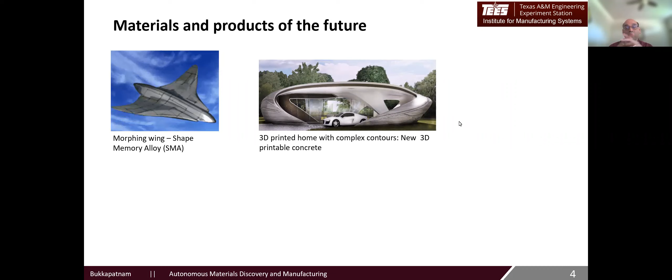To set the stage here, if you look at the recent innovations in materials and processes, they've opened some very exciting possibilities to create entirely new, radically new kinds of products. One example is the fact that new classes of shape memory alloy materials, especially the high temperature and extreme environment shape memory alloys, or SMAs, are leading to the creation of so-called morphing chevron wings, as well as other extreme environment structures. Similarly, the discovery of newer kinds of concrete are starting to revolutionize 3D printing of whole homes, as well as several consumer products. These discoveries are essentially fueled by three major global imperatives.

The first one is because of the growth in the competitive landscape.

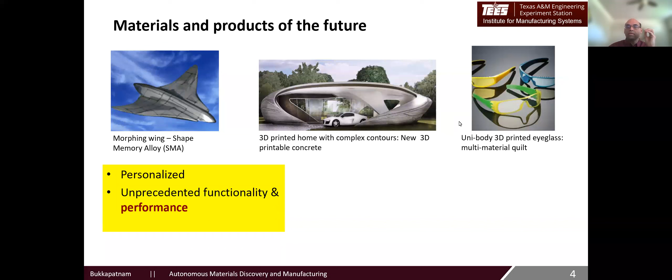There is a need to enhance the performance envelope of various products and systems for industry as well as the strategic sector. The second driving force is the global push towards green energy and green manufacturing, which is forcing the reduction of material usage as well as optimal usage of materials, processes, and energy.

The third driving force is the growing problem of critical material shortage, especially for some highly strategic applications, as well as emerging sectors like autonomous transportation, where battery is going to be critical, and the newer hydrogen economy, hypersonics, and microelectronics.

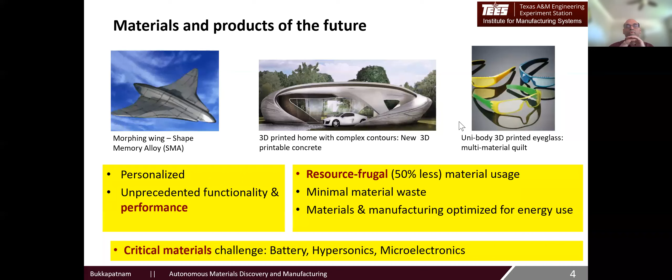While this discovery is an exciting and emerging topic, the process of discovery has traditionally been a very long drawn process. To underscore this, let me provide a case study based on what one of my colleagues, Professor Ibrahim Karaman from Material Science, has experienced.

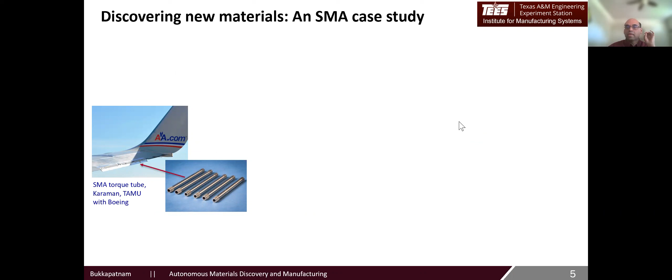He developed an SMA torque tube, basically a shape memory alloy component, that became part of aerospace structures in recent years. But the discovery of this material essentially involved a painstaking effort where he created a precise composition of a nickel titanium hafnium system, and it was processed through a multi-stage manufacturing process, each controlled with a precise set of process conditions to realize the desired shape memory effect that was helpful for functional application.

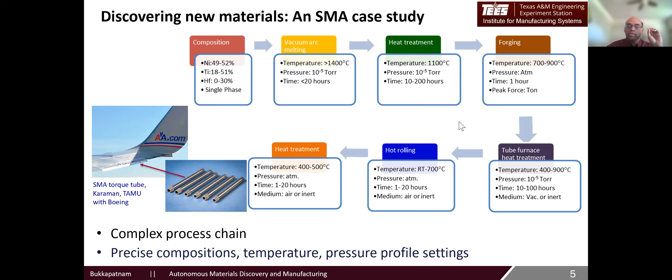This process of arriving at the material composition as well as the processing recipe took about 15 years. And this 15 years essentially involved running multiple iterations of experiments to make sure the end goal of the desired shape memory characteristic is reached, by playing as well as tailoring the structure of the material at multiple scales and from multiple ways, looking at the crystallography, the grains, precipitations, and so on.

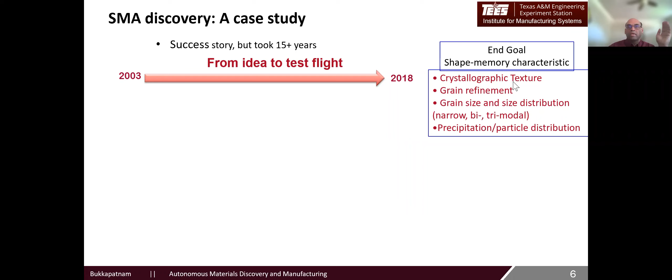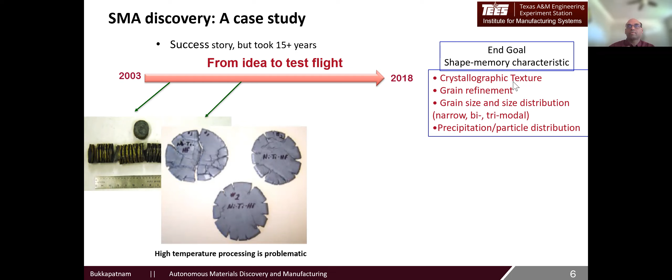If you look at the entire process of innovating this material, it essentially involved a series of iterative experiments. Initial iterations were mostly not successful. Over time, through experimental iterations, they were able to make progress, leading to the creation of the final product system. And this is what took those 15 years, essentially: make, try, and measure, and then try to make again.

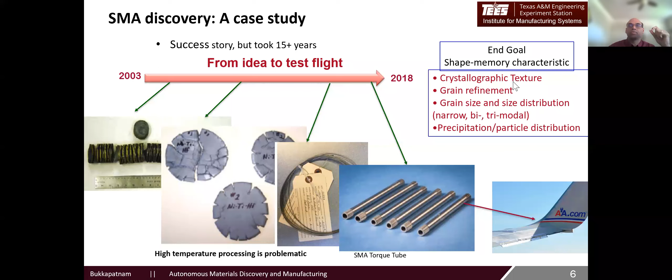This process of iterative experimentation, if you abstract it up, can essentially be seen as having each experiment be a point in the abstract material design space. In other words, if you think about the entire process of choosing the right experimental point, it essentially boils down to choosing a particular value for the composition, the various process settings, the temperature, the pressure, the force profiles, and so on, so that you realize a particular combination of these properties, like crystal structure, grain refinement, etc.

The overall process of experimental iterations leading to the discovery boils down to basically searching this material design space to find the desired combination of the composition as well as the processing conditions to achieve the desired structure. As you can quickly see, such a traditional process of materials discovery is lengthy and of course can be very expensive.

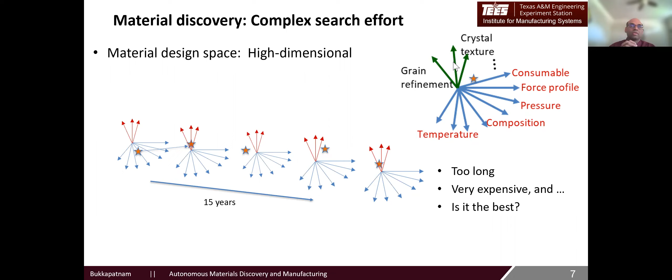With the modern capabilities that we have, we can even think about an audacious goal of reducing this overall time for discovery significantly. The goal of AMDM, or Autonomous Materials Discovery and Manufacturing, is essentially to achieve this compression in time and increase the efficiency as well as effectiveness of this discovery and manufacturing process.

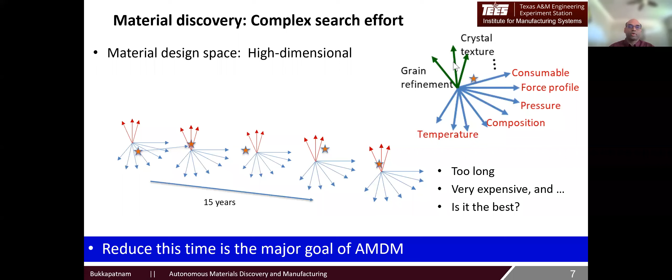So to state the objective: it is essentially to discover novel materials with specified tailored properties, as well as their manufacturing recipes, automatically and autonomously through computers by the use of advances in artificial intelligence and data science.

Although this goal looks a bit audacious, such AMDM systems have already been realized in other fields, especially in drug discovery type areas, as well as chemical processes. There have been some recent successes.

A couple of years ago, a paper from Nature talked about a mobile robot chemist that goes through the entire lab, scans through the lab, and then goes to the right instrument or platform to conduct the desired test. Once the test is done, it goes and measures, and based on what it gleans from the measurement, it decides where to go for the next round of experiments.

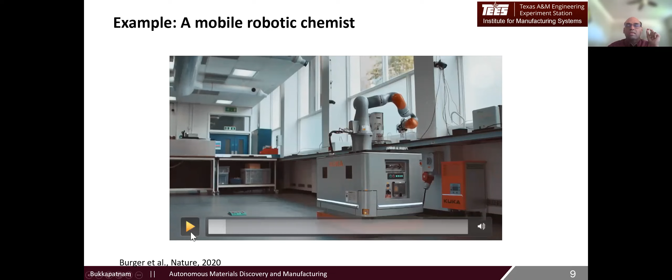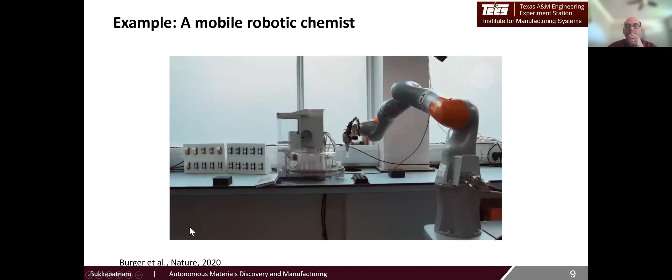This robot helper has been designed by chemists at the University of Liverpool to help them in their research into developing photocatalysts, which are materials that help produce hydrogen from water using light. So these are essentially photocatalysts, and they are trying to find the composition of the chemical to achieve the desired efficiency in generating hydrogen.

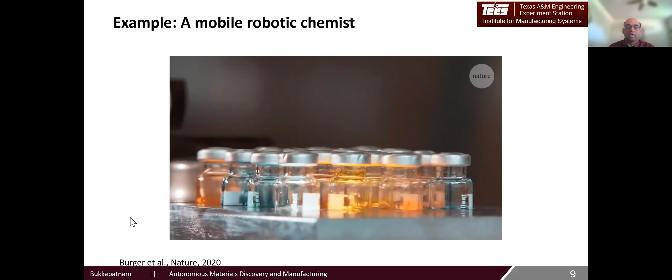As you can see, this is just a chemical process, and many of these steps basically take a few seconds. Many of these experimental steps can be done on an experimental bench. But if you try to translate this drug and chemical discovery to manufacturing, it might actually have a slightly different connotation.

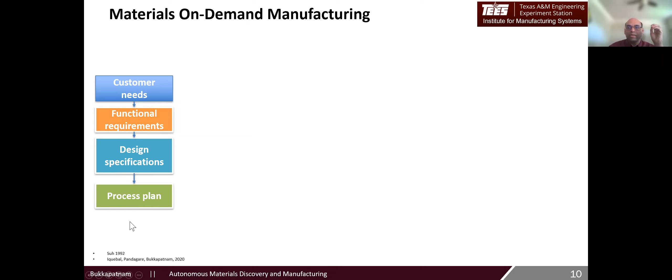If you think about the difficulties in translating this to manufacturing, one way to think of it is what it actually takes to change the goal into a particular product design and manufacturing recipe. Over the years, the manufacturing community has come up with a design process. Today's process plans invariably talk about converting specifications into a motion path plan for the machine to achieve a desired geometry.

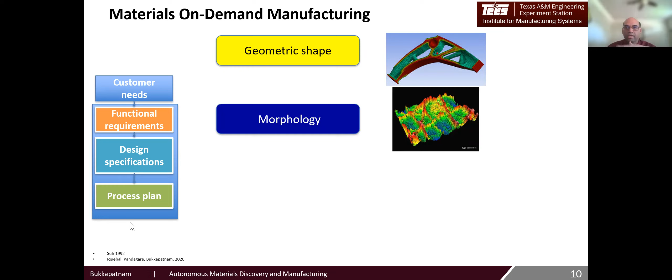In other words, you can control or generate the geometry based on the requirements. Some of these systems at the high precision level can also control the desired morphology or texture on the surface. But very few of these systems can take the specifications and generate the desired microstructure, material compositions, and so on.

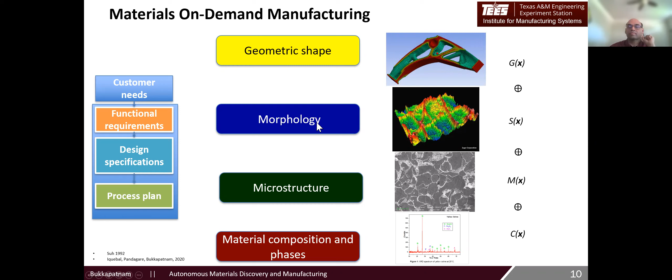This remains a major challenge: how to convert the requirement from the customer so that you're not only able to generate the desired shape, optimized for the morphology, but also for the microstructure and compositions. Why is this a major challenge?

Compared to many other systems, most of the materials we typically use for manufacturing, their processing recipe and how it relates to the desired structure, microstructure, as well as the properties that emerge out of the structure—that relationship remains extremely complex. This relationship, capturing the process to the structure of the product you generate, to the resulting property and functionality that will be endowed into the product, remains highly complex. This relationship map is called the PSP map: process, structure, and property map.

To understand this a bit in depth, if you think about a process, it could include what composition you use, what type of process chain you use, and what type of process settings and variation you use to create that particular product. While doing so, you get a product with a certain geometry, morphology, microstructure, and composition over multiple scales.

Given this type of product, what would be the performance endowed into it? That remains unknown for most material systems as well as for many geometries. So if you're trying to build an autonomous discovery system, you should endow the computer with the ability to learn and adapt its processing on the fly, just like what the robot tried to do.

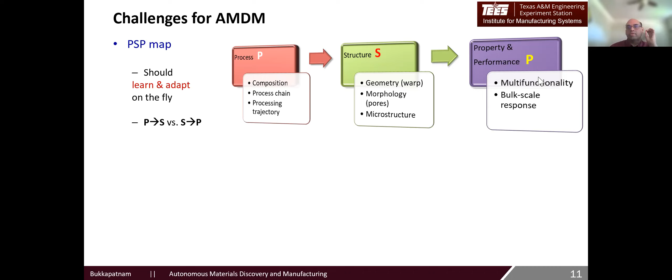Deriving this understanding is quite complex, and a simple set of experiments can be extremely inefficient. If you run experiments within a particular set of parameters, you're pretty much exploiting, and you might end up with highly suboptimal results. But if you keep exploring boldly at random, you're exhausting an extremely large space, and as a result you may not find a useful recipe to use. So there has to be a good balance between exploitation—trying to locally optimize—versus exploration, trying out many different combinations.

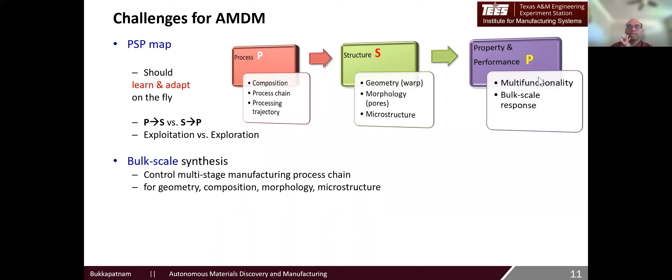Also, from a manufacturing standpoint, creating bulk-scale products that ensure structure uniformly still remains a challenge. When I say structure, I mean geometry, composition, morphology, and microstructure. Controlling all of them, even in a part of a few millimeters in dimensions, still remains a challenge. Once you realize this, you can determine its property, but making this connection between the process and the structure, for the most part, remains a challenge.

Also, from a machine tool hardware implementation standpoint, so-called closing the loop poses some interesting avenues for further exploration. If you look at most machine tool controls, they control the process chain or the equipment motion and settings.

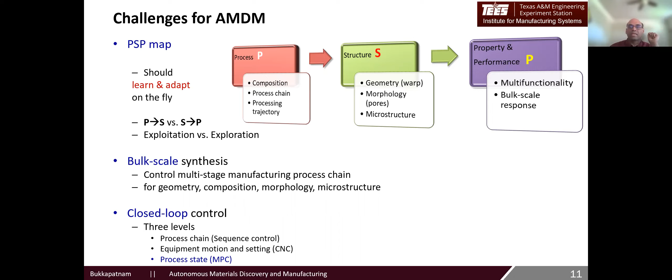Controlling the process state remains an open area, and a lot of work in-process sensing and control are ongoing, and they can all be made to focus to address this emerging challenge. So this essentially is the overall landscape of this AMDM.

Now let's try to look at what such an AMDM system would look like. If you think about an AMDM system, at the outset it is essentially a software brain as well as a hardware body. You can think about this as a cyber physical system.

This software brain is essentially a combination of various advanced data science and AI technologies that include active learning methods, multi-fidelity data fusion to combine this information to enable this active learning, and adaptive control of the workflow, the processing, process combinations, as well as process settings on the go, so that you can actually trace through and iterate those experiments.

And the hardware body essentially consists of three components. It includes the synthesis chamber where you are making the material and the product, the material handling system that takes that particular material across the process chain, as well as the characterization modules that basically take the material and run it through various different tests to assess how well it performs.

This integration of these two systems and the interplay between the brain and the body of this AMDM system poses some very interesting challenges and at the same time the opportunity. In this context, I'm going to emphasize the idea of autonomy.

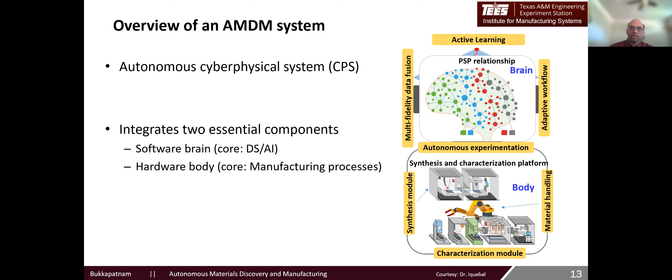Of course, many of us have heard about autonomy in various different contexts. But autonomy in itself essentially means it should have two essential attributes. The first is the ability to learn. That is, it needs to sense the environment and create a mental model of the underlying relationships.

Here, the process, structure, and property map based on this new data. And the second is adaptation, which is it should be able to change the way it has been operating or the set of path it's going to take based on the mental model and its updates. So every autonomous system should essentially have this both learning as well as adaptive control of its motion plan in some sense.

In addition to this, there are advanced levels of autonomy that you can endow your system with: the ability to recognize things, the ability to empathize with things, and also make some higher order reasoning about what it's able to perceive. And all of these go into developing an autonomous system.

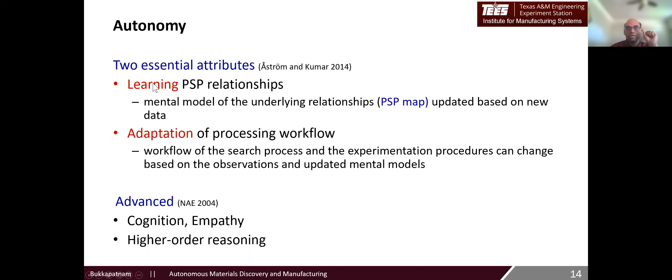And also in this context, learning requires a specific discussion in the context of manufacturing. If you look at most of the learning systems, they are predominantly based on supervised learning.

To make the comparison with autonomous vehicles: these autonomous vehicles work to autonomously recognize the stop signs as well as speed signs to make appropriate adjustments because they were trained with millions of photographs a priori. Using supervised learning methods or deep learning methods, they were able to recognize those signs to make appropriate adjustments. And these systems are used as part of modern cars.

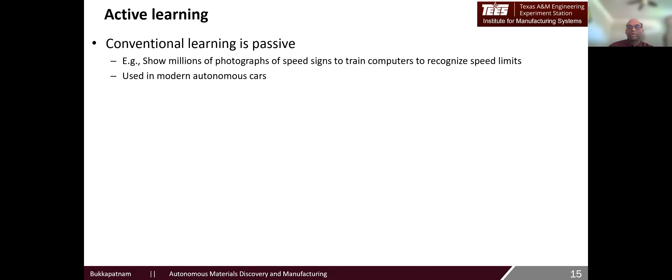But such type of photographs are very inexpensive to gather. You can just run a car and then make it take photographs on the go and then get those photographs as inputs to train. But in manufacturing, each photograph is one experiment, and manufacturing experiments are almost always expensive.

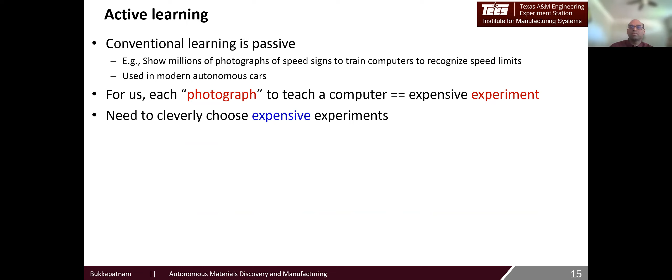Typically, in an industrial setting, a single manufacturing experiment can cost sometimes a few thousands of dollars. So you cannot think about creating millions of such experiments. We therefore need to think about a clever way to choose these expensive experiments so that you can still be able to learn the underlying PSP relationships.

And the ability to choose how to search this high dimensional and complex material design space to learn this PSP relationship is essentially at the crux of active learning, and computers will be used to develop these active learning schemes of an AMDM system.

What the system essentially consists of is using data from the experiments, from the characterization as well as in-process sensors, so that this active learning engine, or the brain of your AMDM system, can learn the underlying relationship and provide input on how to run the next experiment, so that you are getting closer and closer to understanding the underlying relationship, at the same time reaching your desired goal.

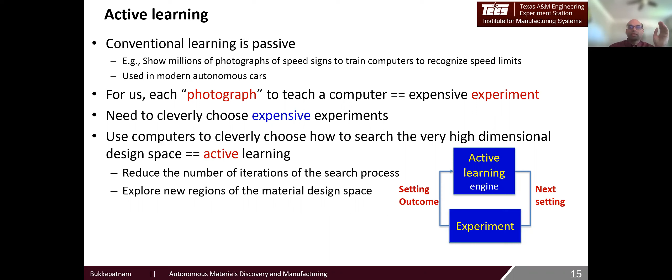This process of active learning doesn't require as many experimental points, therefore the number of iterations and hence the entire time to search and discover can be significantly reduced. And that will help us explore new regions and thereby make this entire search process more efficient. And if we are lucky, we can even achieve optimality or even super optimality.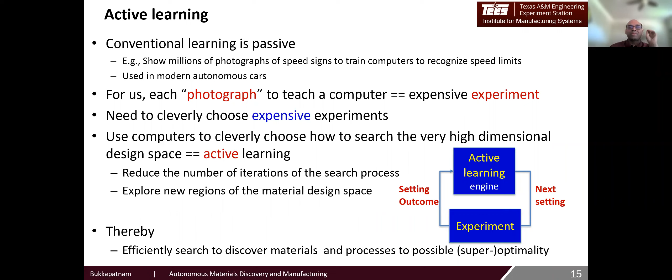We can speculate on many of these things. This is essential background about the architecting of this AMDM system. What goes into this AMDM system are two components: the brain and the body. In the remainder of this talk, I will try to elaborate on both the brain as well as the body.

First, about the brain. The brain essentially consists of two components: the forward mapping and the inverse mapping. The forward mapping basically takes the data from your experiments and develops this PSP map, going from process, structure to property, so that you can predict the property from knowing the various aspects about the process you are using to create that material or product.

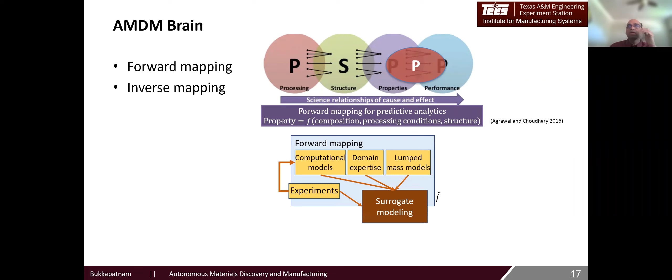To do this, these experimental data gets fed into computational models, surrogate models, lumped mass models, and so on, to create typically a statistical representation of the underlying relationship. The inverse mapping essentially uses these models to develop an efficient and clever way to search this material design space, so that once we give the goal of what we want to achieve, it goes through the process of inverting your models so that it suggests where to run the next round of experiments.

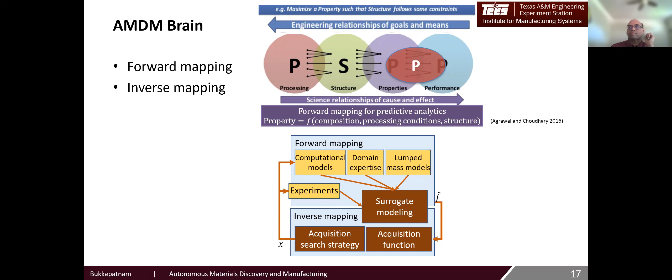The next few slides, I will talk about the forward modeling. The forward modeling, in effect, can be thought of as forward models to capture the relationship between structure to property, and the second part consists of models to relate process to structure.

If you look at the structure to property models, they could be of two types: computational models or statistical surrogate models. Computational models tend to be basically derived from first principle physics and mechanisms, and they typically tend to be highly computationally expensive. Therefore, they're used to capture things over short times and short spaces to study the effect of a particular structure on a specified functionality.

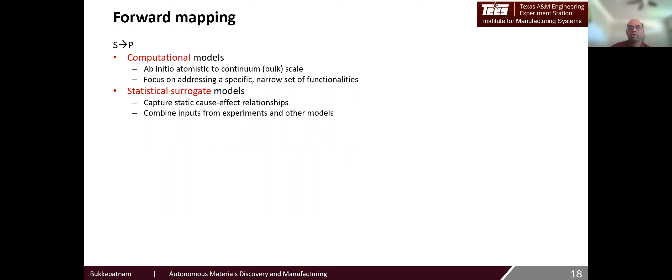On the other hand, the statistical surrogate models essentially capture the cause-effect relationships typically gleaned from the experiments as well as from the computational models. The greatest advantage of using these statistical surrogate models is the simplicity, speed, as well as the ability to fuse multiple models, while also helping to drive the various inverse mapping approaches we discussed earlier.

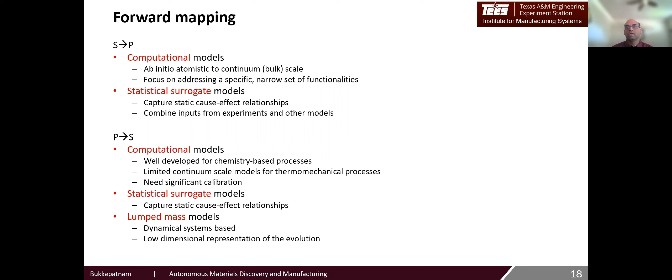Next comes the process to structure relationship. These models right now are not fully developed even for most traditional manufacturing processes. Currently, there are quite a few computational models, statistical surrogate models, as well as some dynamic models available to capture those. In this presentation, I will try to outline some of those and share some perspectives on both the S to P as well as P to S mapping models.

The structure to property computational models come in various different flavors, depending on at what scale you want to study that particular structure to property relationship. For example, if you're looking at studying elastic or mechanical properties, you look at continuum models like FEM models. And if you're looking at the quantum chemistry in terms of how hydrogen gets embedded onto graphene, you'd study the quantum chemistry or at best molecular dynamic models.

Right now, there are quite a few implementations of these computational models available for the manufacturing and engineering community to use. But it should be noted that each of these models is application specific, and at the same time they invariably involve high computational load. Typically, you use some high-end, high-performance computing environment to run many of these codes.

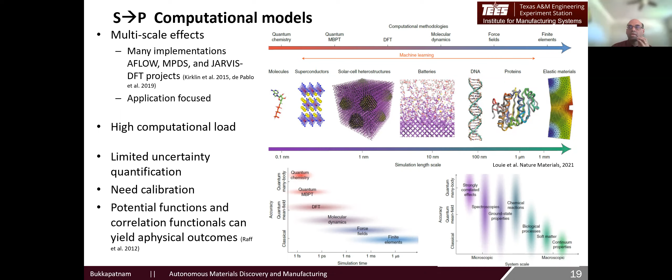From a limitation standpoint, they tend to assume determinism, in the sense that they cannot give you uncertainty quantification. So a lot of hits and misses happen because of this. Most of these computational models, if not all, require some form of calibration. And the third and most important component is that every one of these models involves a little bit of empiricism.

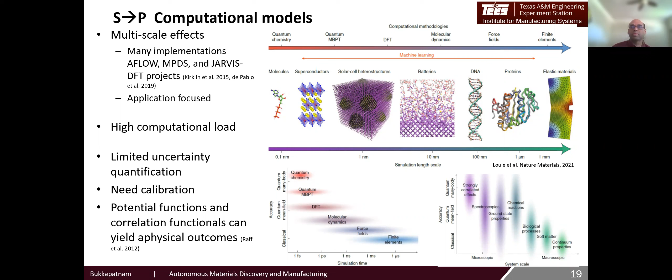For example, in molecular dynamic models, they use potential functions, and in other cases, they use certain types of correlation functionals. If we don't get them right, the results can be completely almost absurd or aphysical. So this is the thing to watch out for while using computational models. And there are quite a few opportunities to look into each of these aspects and try to develop or further improve these models.

When it comes to surrogate models, there has lately been extreme interest in the material science community in using machine learning approaches as a substitute for some of these computational models, because the surrogate models can be much faster and they can capture this uncertainty much better than what computational simulation models could.

These surrogate models come in one of three types. The first type essentially are small components that you incorporate within computational models to speed them up. You're not creating a surrogate model independent of the computational model, but taking a bottleneck component and replacing that with a surrogate model.

And the third type of statistical models essentially fuse multiple computational models as well as experiments to create features for further control and such applications, or they themselves can create other kinds of twins based on such data fusion as well as model fusion approaches.

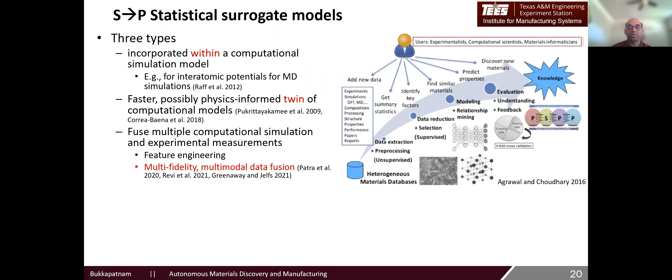These statistical surrogate models, once again, have certain advantages and limitations. One thing is they are only as good as the experimental observations as well as the computational models. For newer processes, especially in manufacturing, domain expertise actually matters quite a bit. So integrating experiments with computational models and human expertise is something being studied actively.

Second thing is many of these surrogate models are predominantly capturing the static relationship between your input structure and the output property. So they may not be efficient in capturing the time-dependent behaviors that you want to predict, for example the shape memory effect in many of these systems. There are some studies people are looking into in this aspect.

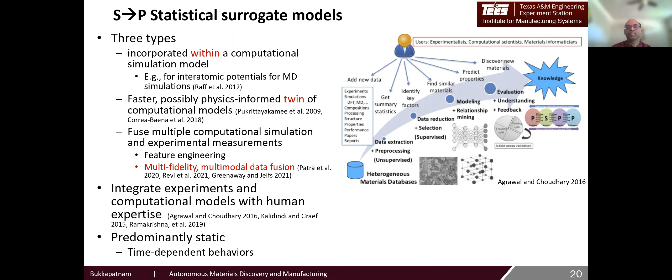When it comes to process-to-structure computational models, they essentially focus on taking the process parameters as inputs and developing various kinds of computational or mechanistic models to predict the geometry, morphology, or microstructure. For example, there have been quite a few models in machining that take the machining conditions and predict the actual geometry and even surface finish.

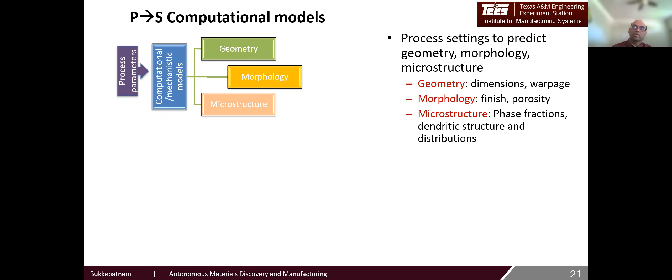Recently there has even been work within the IE community looking at predicting the microstructure of 3D printed components by knowing the temperature settings as well as other process conditions in additive manufacturing processes. There have also been some studies looking at the microstructure from knowing the actual processing conditions.

So if you think about the kinds of computational models available to us, depending on the length scale, you get different kinds of models you may want to apply. For example, if you're only looking at modeling the temperature distribution while 3D printing a component, or the temperature distribution in a weld pool or near the edge while cutting a metal at the interface between the tool and workpiece, you typically use what we call continuum scale models.

As you try to go one scale down while predicting the microstructure, the dendritic formations, as well as maybe even atomistic scale phenomena, you basically have to use different sets of models, including phase field modeling, kinetic Monte Carlo, cellular automata, and so on, as well as some first principles models to derive this relationship between process and structure.

Here, you're pretty much asking the question: if I run this particular material through a particular processing trajectory of thermal history or force fields and so on, how does my material structure result from this entire processing chain that I make the material go through?

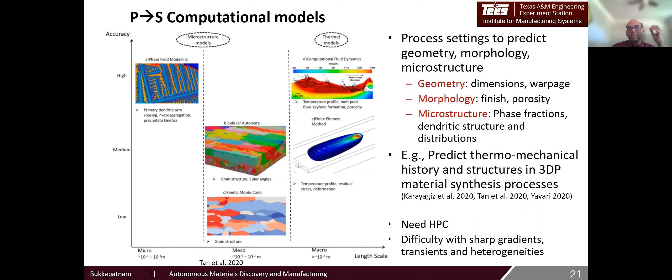As I mentioned, static models have been used as possible substitutes or fast equivalents of these computational models. But for capturing process-to-structure relationships, they tend to be quite inadequate because the dynamic phenomena I just laid out—the sharp gradients, the transients and heterogeneities—are hard to capture using simple statistical models. One way of addressing this is the use of lumped mass analytical models.

So the underlying notion is to borrow the principles of small active degrees of freedom as well as recurrence inherent to many of these manufacturing processes as well as other dynamic systems. And these ideas become the root of developing low-dimensional representations so that you can quickly predict some of the spatiotemporal evolution of the structure due to the effect of the process.

The advantage to using some of these first principles lumped mass models is that you can actually build these models with limited data. An example here is trying to model the deposition of a material from one of the most common 3D printing processes, FDM, using a 2 degree of freedom analytic model.

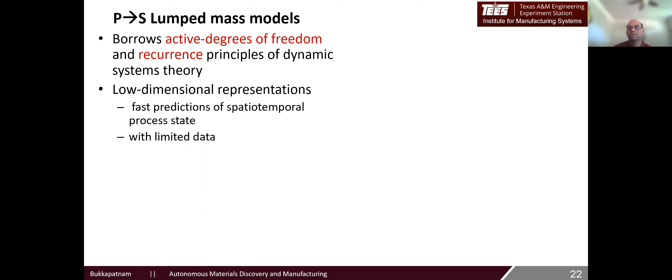So the entire idea of how the material comes out of this nozzle, as well as how the material gets deposited onto the surface, can be modeled using a back pressure, or that's the force that the material experiences due to the effect of deposition, as well as the response of the structure to this force in a dynamic fashion.

And these reduced order models have been used in various different manufacturing processes by Professor Rao, Professor Kong, and others in this field.

And these models can be useful in predicting some of the outcomes, such as the overflow and its effect on the surface, the endpoints in polishing, and so on.

The advantage to some of these lumped mass models is they can be much more interpretable compared to deep learning models. However, with the availability of more and more high resolution sensor data, it makes it possible to develop recurrent network, deep recurrent network type models that can replace some of these explicit lumped mass system models, and they can be something for our community to pursue in the future.

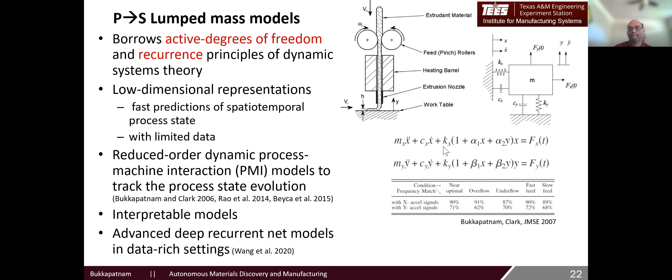Next, let me spend some time talking about the inverse mapping. The inverse mapping essentially focuses on trying to use these computational models, both P to S and S to P, to be able to determine where to run the experimental iterations.

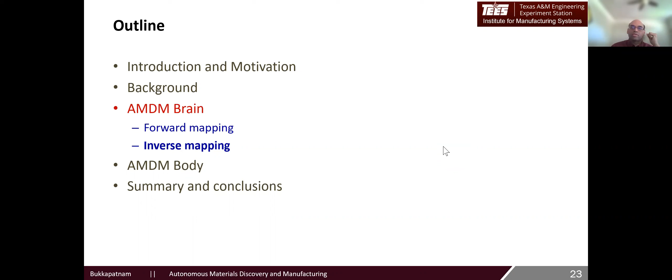And when it comes to this inverse mapping, historically there have been two schools of thought on sequential experimentation. The first one evolved from the statistical foundations laid by Fisher, Box, and Professor Jeff Wu and others. And the second one from the decision and control theory developed by Dr. Wald.

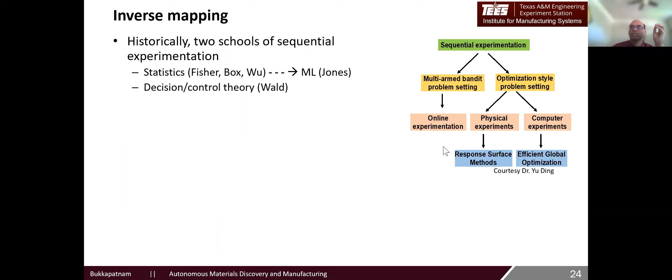And if you think about it, these statistical foundations have evolved into a Bayesian optimization framework, and this is what is typically used in modern inverse mapping applications. It basically consists of the ideas of acquisition functions as well as the search strategy, which I will talk about in a minute.

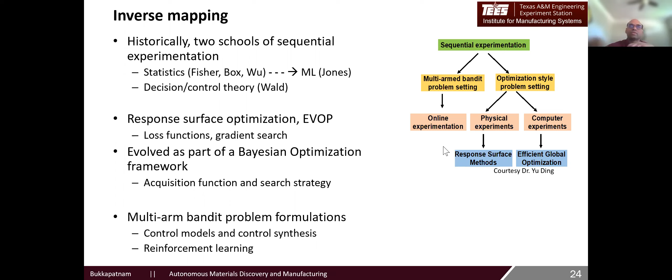The second line of thought led to the multi-armed bandit problems that use the control theoretic, control model, and control synthesis equivalents, and that have evolved into the ideas of reinforcement learning.

And when we think about this emerging Bayesian framework, it essentially uses the initial surrogate model and determines certain acquisition functions, more like an objective function, as well as a search strategy that takes how we can use the outcome of the acquisition function to determine your next experimental point.

So when an initial model is fed, the acquisition function is computed, and then based on the acquisition strategy, you determine the experimental point and run the experiments. From the data from the experiments, you update the model, and once again determine the best X, and so on. You go through the sequence.

And how do you design your acquisition function? Essentially this is an interesting challenge in itself. It's basically called the exploration versus exploitation dilemma - whether to improve my response or increase the understanding of the underlying PSP is basically at the root of this exploration versus exploitation dilemma.

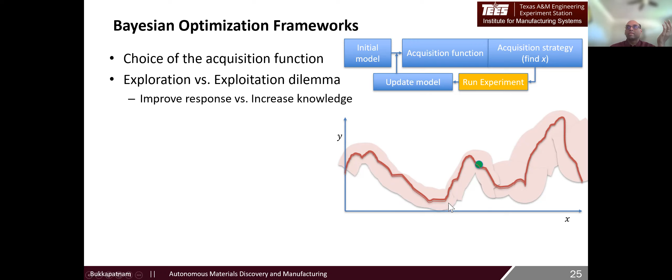The dilemma is, where should I run my next experiment based on the model that I'm able to predict at this point in time?

I could use the so-called exploitation, where I know the value of Y here, so let me try out the best Y in this particular region - that is, exploiting the local curvatures around it. Or I could randomly explore at a particular point, or explore based on my understanding of where there is large uncertainty in the underlying relationship. Or we can use a combination, where you see how much improvement or decrement you have with respect to the initial value, as well as the uncertainty - a combination of both the DC and AC information.

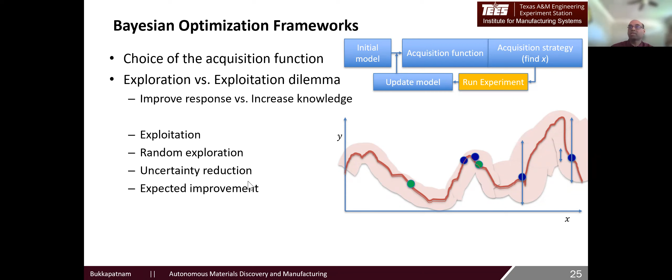So depending on how you design your search strategy, you can exploit, randomly explore, or use the model to reduce uncertainty, or improve both exploitation and exploration. The expected improvement, or EI, tries to strike a balance, but that may not be the only way. There are quite a few methods designed for improving the knowledge as well as improving the response, and achieving balance between the two.

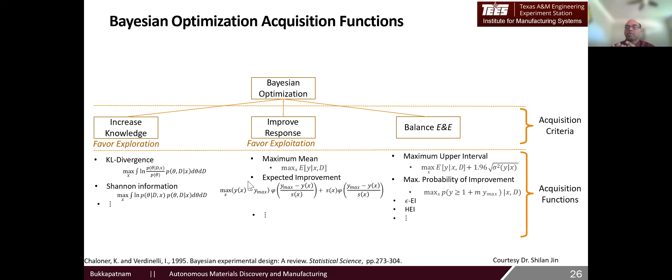So we use whichever approach depends on the objective we want. For example, if you want to understand the PSP relationship, you could use a more knowledge-increasing type of acquisition function. And when you're trying to find a particular type of material or process recipe, you could use one of these other types of acquisition functions. Once you use these acquisition functions, you can iterate and invert the model to run the experimental iterations.

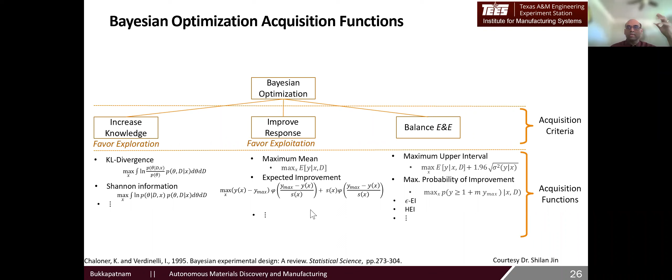This type of forward and inverse mapping essentially constitutes the brain, and it gets implemented into modern autonomous manufacturing bodies - the hardware systems. These hardware systems have evolved considerably from their initial stages. The initial ones were mostly based on heuristics, and from the 2000s onward they became more automated systems with hard-coded logic. But in the last few years, they've evolved with a lot of autonomy built in - that is, learning and adaptation.

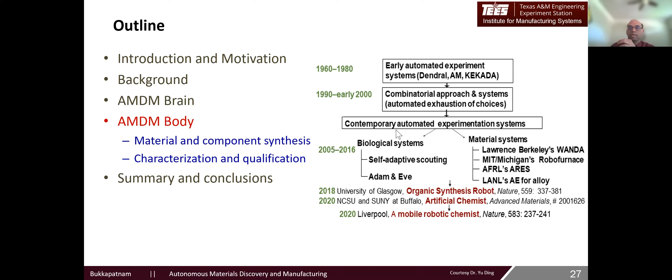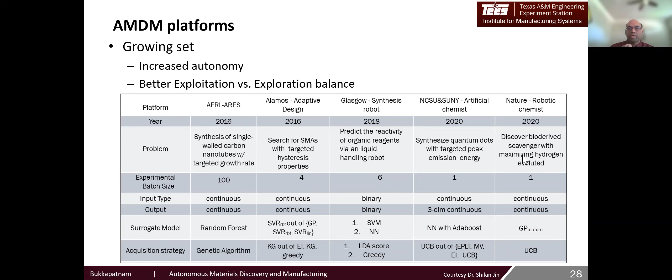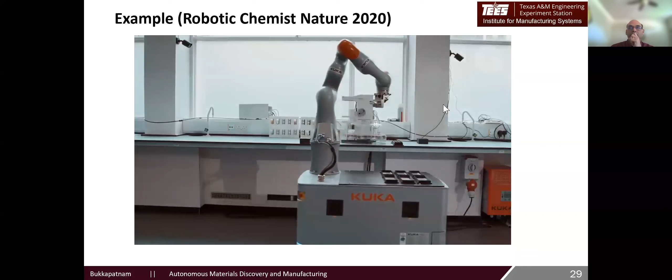In the remaining time, I'll play a video of an existing system. It communicates with a software control system wirelessly - it needs to be wireless because it's moving around a large space. The robot weighs out the solid catalyst, dispenses the liquids, shines light onto the samples, measures the outputs - which is hydrogen - and based on this output, the hydrogen emission from the experiment, it makes a decision about what to do next. Just like a human chemist, this robot needs to adapt its workflow based on the outcome of its experiments.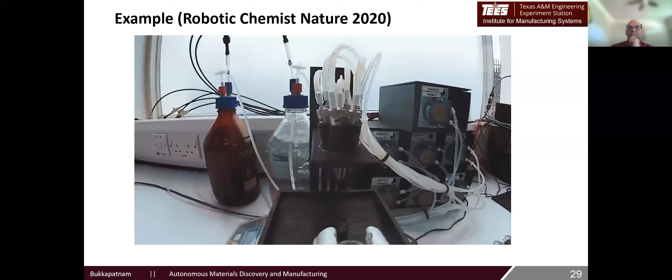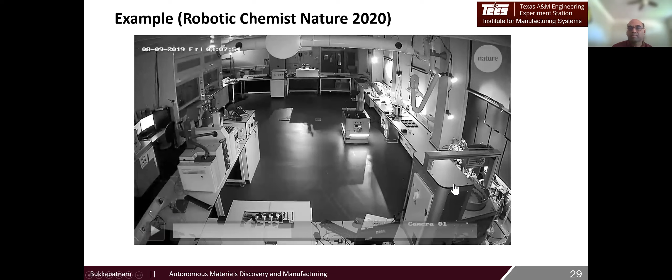This requires a computational solution. If you work out the number of possible combinations of components in the experiment, it's something like 98 million. So the robot uses an optimization algorithm - Bayesian optimization - to navigate that chemical space, helping it work more like a human chemist. Essentially, it's trying to use a Bayesian optimization framework to determine the right experimental strategy, and it uses EI as an acquisition function in this particular case.

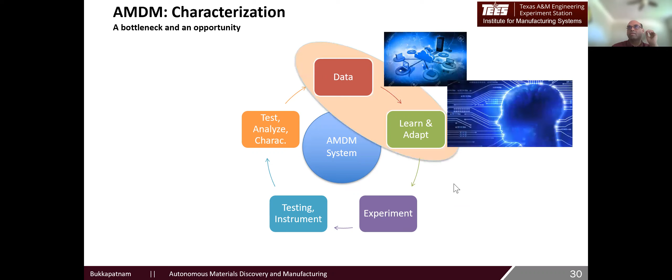The last component of the body is not just about synthesis, but about measurements. This becomes a very interesting challenge, because if you look at the entire cycle of autonomous materials discovery and manufacturing, we have advanced methods to learn and adapt, and sophisticated experimentation and manufacturing platforms to create various materials and process chains. But the measurement systems to correctly assess the precise compositions and structure remain the major bottleneck in this entire cycle, and there have been some interesting works in this area.

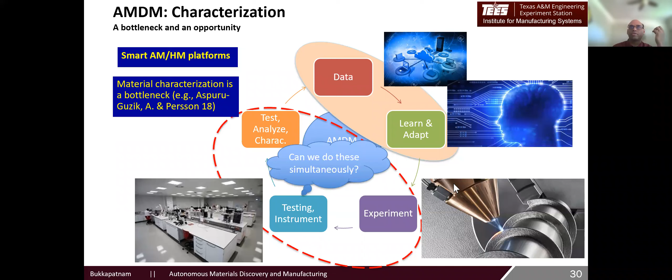One idea is: can we actually combine characterization with processing, and do all of them in a single shot? I think that's an interesting possibility. The smart hybrid platforms we're working on provide one such opportunity. This hybrid platform allows 3D printing, machining, polishing, and in situ measurement and characterization in a single platform. Since you're doing all of them with a single datum, it significantly reduces process time, so you can use these experimental iterations more cleverly and efficiently. Because of the sensors we've incorporated, you can possibly achieve control beyond just shape and morphology. Microstructure control is still in progress, but we hope to achieve it much better compared to many other manufacturing platforms.

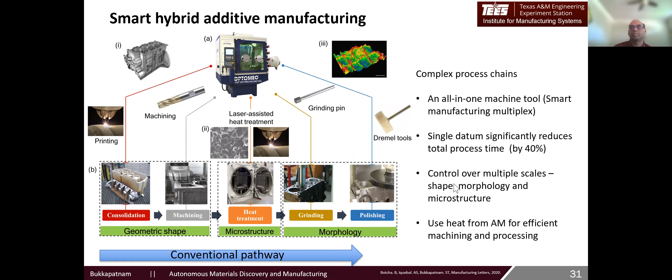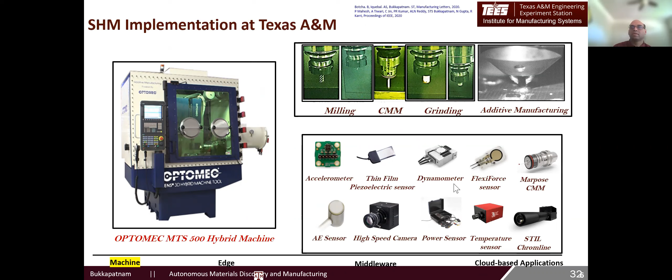This machine has been endowed with 14 different sensors of different kinds. The advantage is that if you align the sensors well, you can possibly capture information from different multimodal aspects. For example, vibroacoustic data from the process, thermal and temperature data, and control data from the machine tool itself, gathered simultaneously using different cameras.

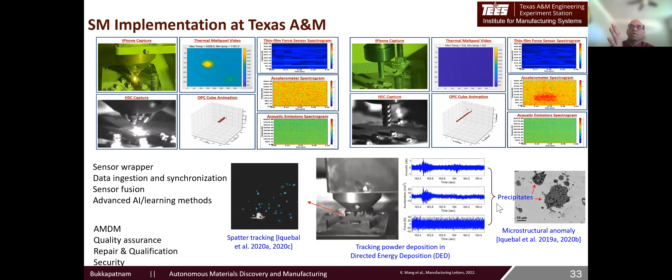This information can be used to track the evolution of the process as it goes, and you can use it for mapping the trace of what the process was doing when a particular structure was realized. So you can make voxel to voxel comparison of structure to property.

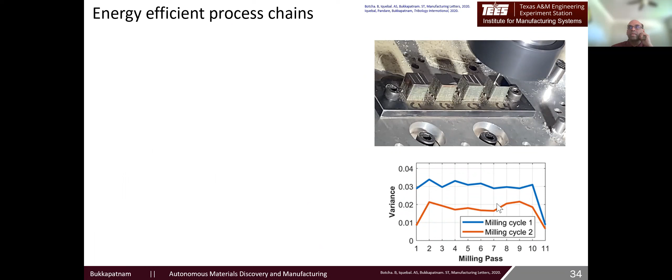In addition, this machine allows efficient processing of materials. As a result, using the same structure, you can not only get the material but also create samples, giving more consistent test results from characterization. We could prepare the sample on the fly and create structures with an Ra of 10 nanometers if needed, almost creating metallic mirrors while 3D printing. We can also use the sensors to study the energy footprint and possibly optimize it.

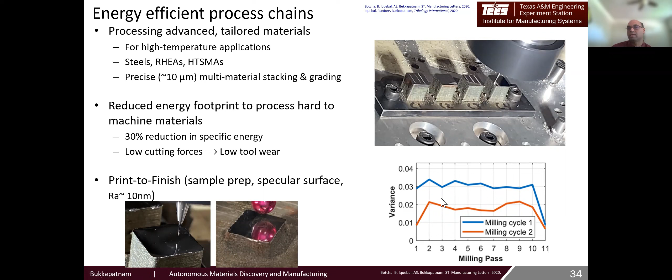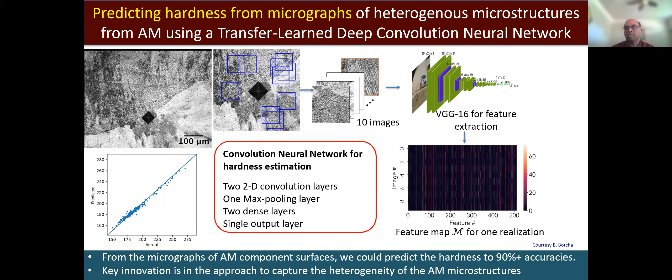More importantly, one recent work has been using images gathered ex situ to quickly determine the hardness of the material using just image measurements, along with sensor data from processing a hybrid cycle consisting of printing and machining. We could estimate hardness without having to take the sample through the hardness testing routine.

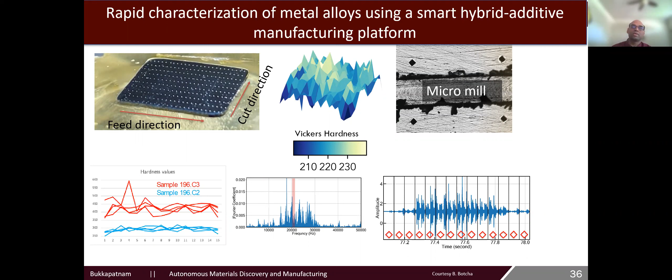So there are quite a few interesting possibilities that emerge in this context.

Given the time constraint, I'd like to summarize. I hope, based on the understanding of an AMDM system, its brain and body components, and the challenges, we're getting some thought about the possible disruptive nature of this AMDM technology. It's quite an interdisciplinary field, and for the manufacturing and systems engineering community, the fact of combining multiple processes to influence the structure is a tantalizing possibility.

So you're not discovering a new manufacturing process in particular, but trying to discover a suitable manufacturing recipe. The challenges here are growing, taking the form of combinatorial manufacturing, multimodal manufacturing, and hybrid manufacturing, depending on which group you're looking at.

However, there is one challenge, especially the systems engineering challenge, that hasn't been tackled much: we assume that material precursors are readily available. We completely ignore the supply chain whereby you generate those precursors. I think there's a very interesting challenge, not just within the process chain, but the entire supply chain for this material.

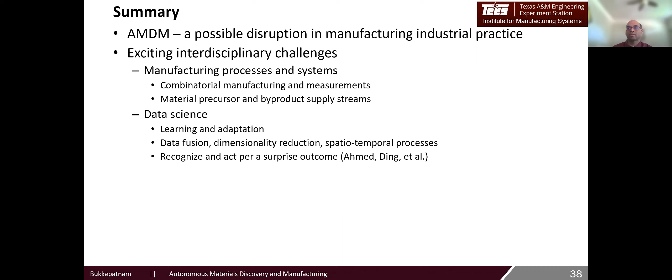Also, from a data science standpoint, it poses interesting opportunities from both learning and adaptation standpoints, for data fusion, dimensionality reduction, and capturing the spatio-temporal evolution I mentioned. The works of Professor Ding and Professor Imtiaz Ahmed have been looking at recognizing and reacting to surprises observed during these processes, because surprises have often been precursors to various discoveries throughout history. So there are very interesting data science and AI challenges for the industrial engineering community.

Similarly, from the operations research standpoint, a lot of work in data-driven dynamic decision-making could become applicable to these AMDM platforms. Advances in dynamic programming, reinforcement learning, and federated learning paradigms that our OR community has studied can be implemented here, and those studies could be advanced based on interesting nuances this platform presents.

And similarly, last but not least, collaborative robotics becomes extremely important here—how we can use human intuition, experiences, and skills to further advance autonomous manufacturing remains an interesting possibility. I hope this is something our IE community also takes up as a possible avenue of application.